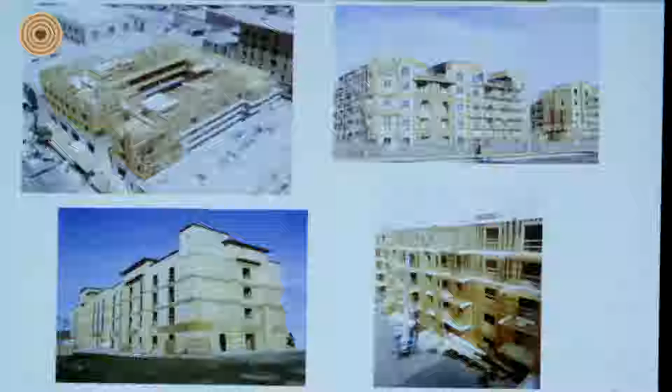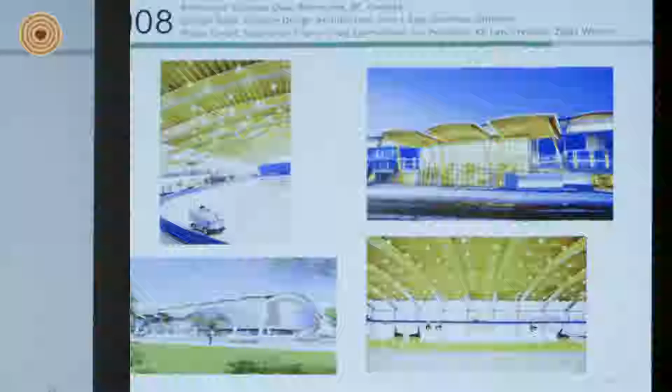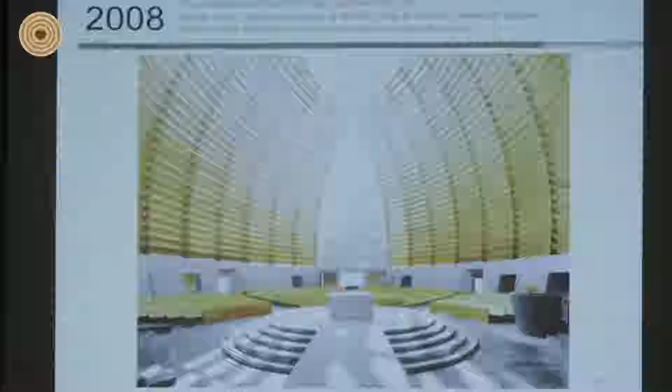But then when I joined Woodworks, it opened my eyes to what really is going on in the rest of the world. Here is a building that was completed in British Columbia, in Canada. And I'll highlight these structures just to give you a feel for what we're going to be talking about. And this is actually in California, high seismic zone, prone to earthquakes, up in Oakland, California. Now, I was fortunate enough to visit this cathedral, and it's so peaceful when you walk inside. Not just because it's a church, but because of the exposure of the wood that you see, the warmth of it.

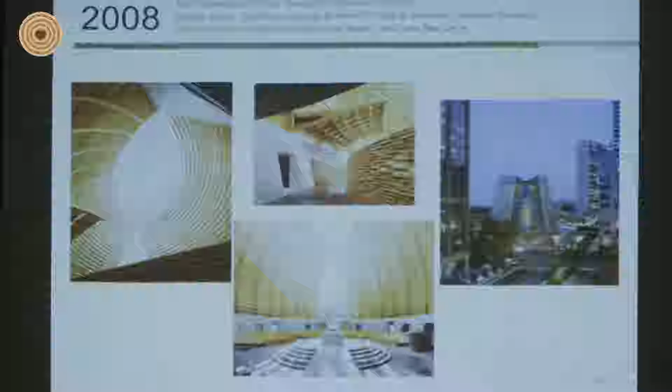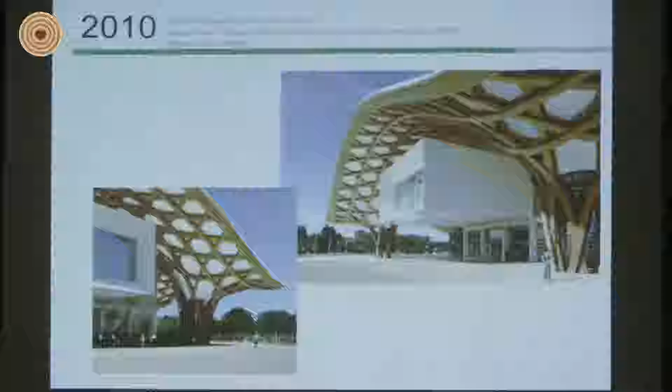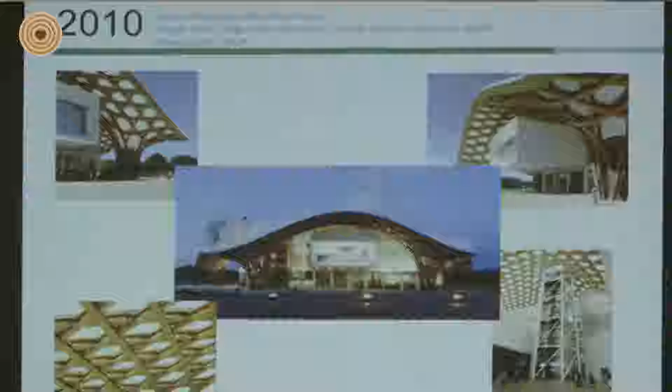And this is a very interesting structure, to the very top of the spire. It's 245 feet tall, but the organic look, how the waves of the wood curve organically, is pretty impressive of what they can do with wood structures. Something we don't always think of wood having the capability of doing, spanning far distances and reaching great heights.

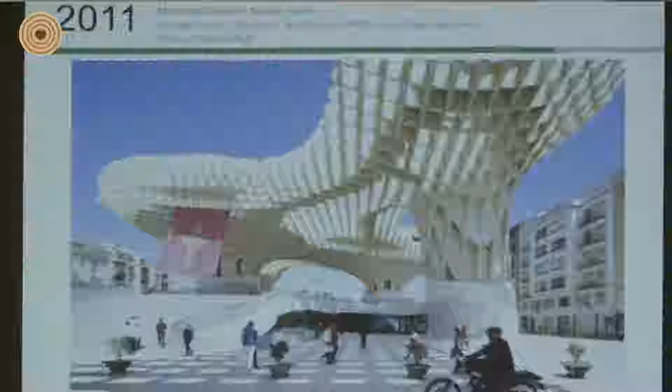This is the largest wood structure in the world, and it's about 85 feet high. I should get my notes out. In Seville, Spain, using LVLs, that's laminated veneer lumber.

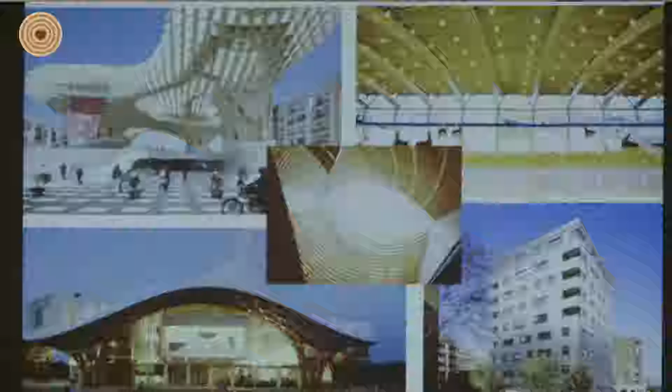So when I joined Woodworks, this really opened my eyes to what's going on around the world. There's a lot of structures being built out of wood. The U.S. is actually kind of far behind on what is actually happening, and in their acceptance of using wood in large structures, we're kind of lagging behind. And that's one of the goals of American Wood Council, to educate and open the eyes of architects, engineers, and building officials on what you can actually do with wood.

And so this is a quote I'd like to share: if the 19th century was a century of steel and the 20th century was a century of concrete, then the 21st century is about engineered timber.

Now, looking back at history, wood has actually been used in structures for quite some time. Here's some structures dating back to 711. Maybe someone can help me with the pronunciation, but this is in Japan.

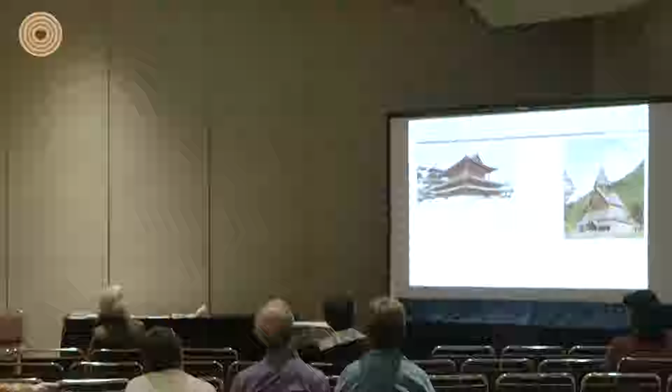But then when you think about it, here in the U.S., we have trees that are 3,000 years old. There's the giant sequoia, western juniper, that's 2,000 years old, and the bristlecone pines that are 5,000 years old. I actually was able to visit that at one time. But we have trees that are still existing, still standing, and they are durable enough to stand the test of time.

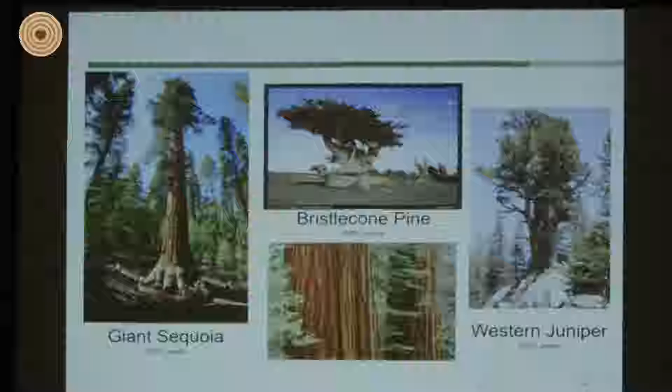So there's evidence that wood structures, if we know how to detail them and design them, can be designed to stand the test of time. It's just understanding the product, which I'm sure all of you know a lot more about wood than I do, from what I've seen out in the expo.

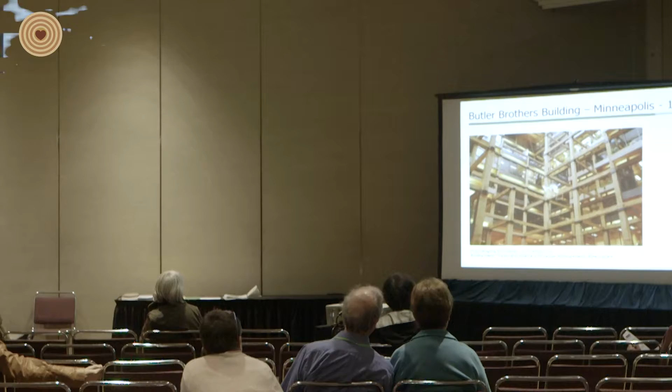And all of these are warehouse type buildings, so there's quite a bit of vertical load on these structures. And this is probably the tallest warehouse heavy timber structure, which is, I believe, 9 stories. Yet the code limits us to only go to 6 stories. And that's where we are at American Wood Council, trying to expand that so we can go taller.

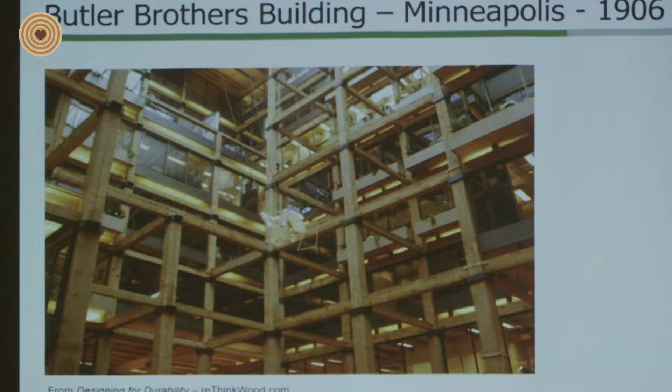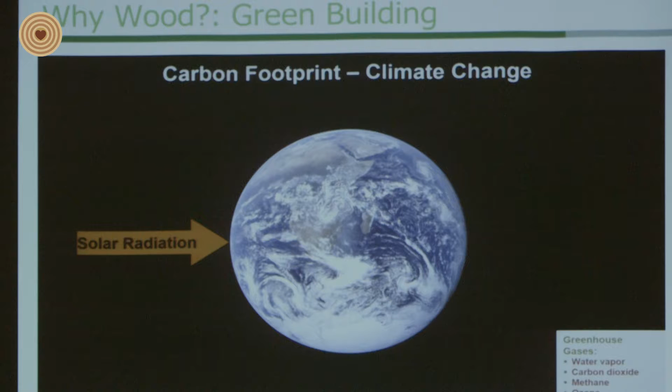And so looking back at the history of what is developed throughout the world and why architects specifically want to incorporate wood into buildings. Some of you may be familiar with climate change, but this is just a very high level of what the thought process is. One, we have solar radiation that heats up the earth, and the heat radiation then goes back out into outer space.

However, there's a gas layer around the earth of greenhouse gases; these are some of the major gases that make up this layer. Not all of the heat is able to bounce back out into outer space, so then we have a buildup, and some of this gas is made by human activity. One of the major gases that some people are concerned with is carbon dioxide, and that's why there's such an emphasis to reduce our carbon dioxide emissions.

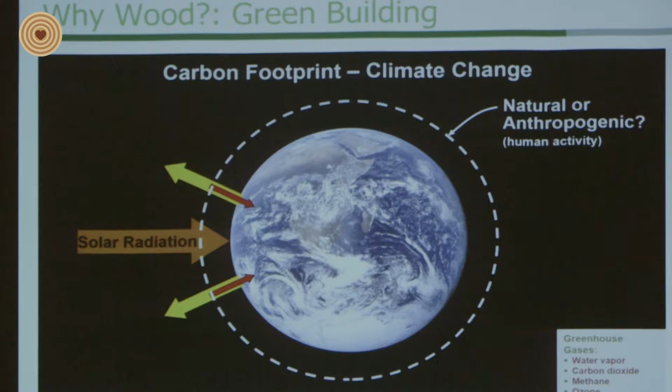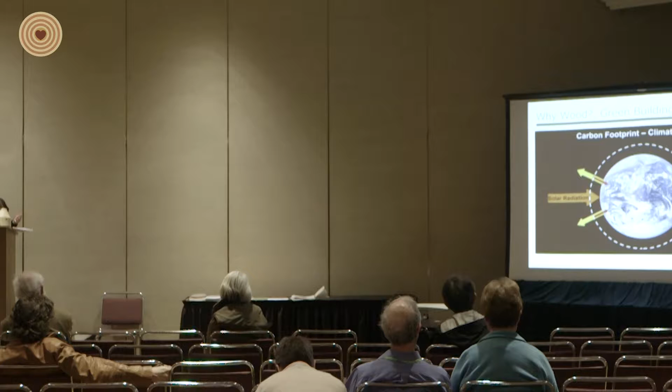So when we look at materials for buildings, we look at the whole life cycle assessment: what it takes to create a product, to get it to the job site, where that resource is coming from. That's why the building industry, especially in other countries, is embracing wood. Wood is renewable when it comes from a sustainable forest. The other materials aren't renewable. They can recycle them, but it takes a lot of energy.

Also, wood stores carbon. It's 49% carbon dioxide, so it stores it long-term until it's disintegrated or burnt, then it goes back into the atmosphere. So they're using this as a more sustainable, greener way of building. Obviously, the greenest is not to build at all or to reuse a building, but that's not always possible, and we're always going to want to build. That's our nature.

So making a very conscientious choice of using wood is what people are choosing. The other reason wood is becoming more popular is because they want to be good stewards of the earth. They want to make sure that they're not utilizing resources that can't be replenished.

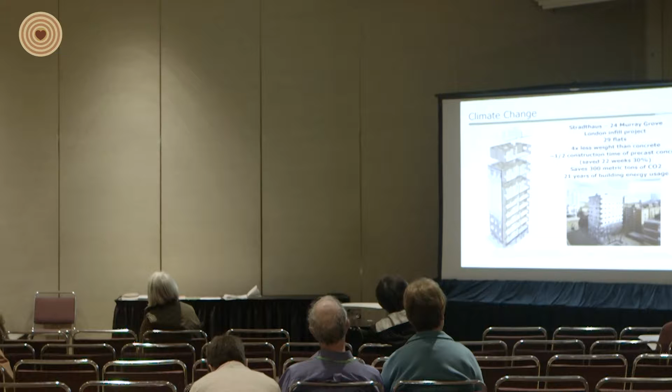So this is one example. If any of you have heard of the Kyoto Protocol, where some countries have agreed to reduce their carbon emissions. One of those countries is the UK. And they state in that agreement that whatever building they build, they need to have renewable energy. They have to have zero impact on the environment as much as possible, but one of those measurables is renewable energy. And renewable energy is really expensive.

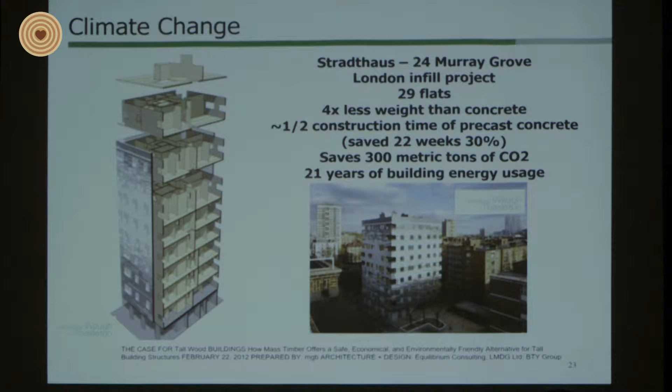So the owner and the architect work together to say, well, when we use wood, we are actually storing, for this structure, 300 metric tons of carbon dioxide. And that equates to about 21 years of building energy usage. So they were able to offset that requirement of renewable energy by using wood in the structure. And I'll get more later.

So the other reasons why we're seeing a shift to using wood in structures is technology, understanding more about the wood material, being able to make wood materials stronger with engineered wood products. Also technology regarding fabrication, using CNC technology to more accurately construct structures. And then prefabrication is also another reason why they're going to wood products. And I'll show you some examples of these three or four

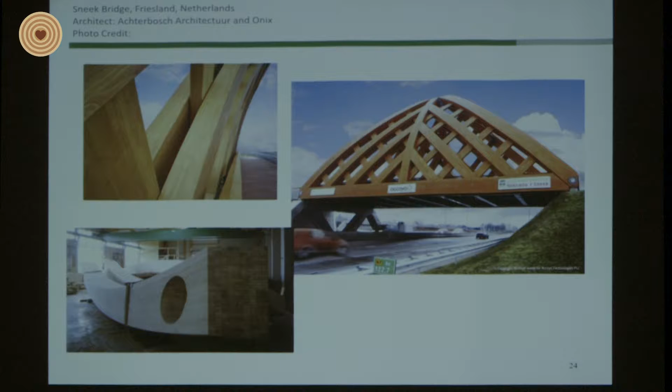reasons why. So that bridge there is a heavy timber bridge and has heavy traffic and spans, let's see, I gotta look at my notes. It spans 105 feet, spanning that.

Here's another bridge in British Columbia, and it spans 145 feet. It does have pedestrian traffic, and it utilizes the strengths of actually 3 different materials. So a higher technology combining wood, concrete, and steel. We have a PT concrete, post-tension concrete slab as the walkway. We have glue laminated timber that is the arch, and also tension rods that are part of the steel structure that acts as the roof.

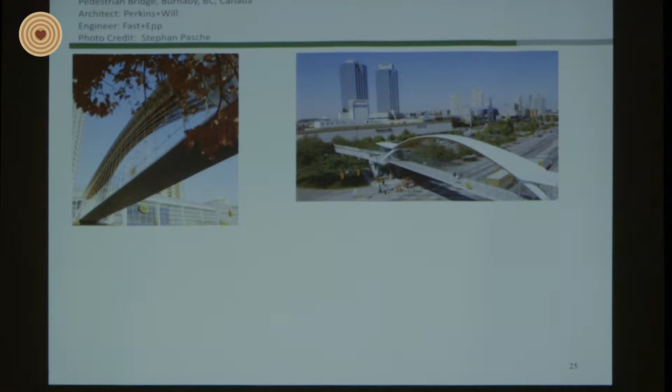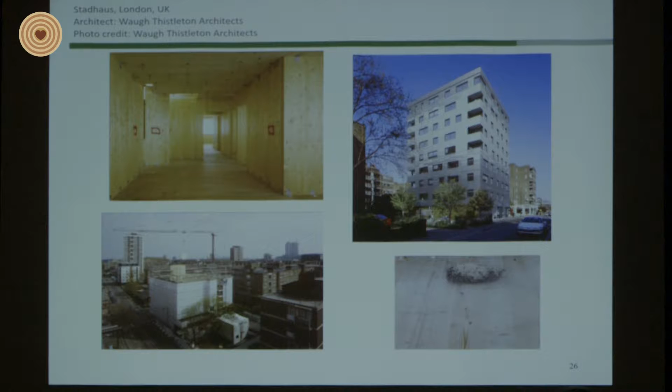And this is more about the cross-laminated timber building in the UK. The other unique aspect about wood is that as opposed to using steel or concrete, which are very heavy materials, wood is lighter. That means that there's less seismic load because the seismic is based on the weight of the building. Also, the foundations are lighter because you're supporting a lighter structure.

And the corner there, because of the prefabrication, all of the CLT panels were fabricated off-site using CNC technology. So they go together very accurately. When they get to the job site, it goes up very quickly, which saves money as well, because the cost of construction can go up the longer you spend on the job site. With the prefabrication process, they were able to erect it very quickly.

And then related to noise pollution, on the job site, it was very quiet as opposed to a traditional stick frame type project, because you hear hammers, nails, drills, and all of that. A lot of loud noises, a lot of workers when they're erecting a traditional wood structure. With this structure, the noise was quite a bit less. You see the crane that would lift it in place, and then

here is the waste of the dust from the job site. Whereas traditional projects, you may see a lot of waste because of the cutting and all of that. And that's the interior. So this is the cross-laminated timber. It kind of looks like plywood on steroids.

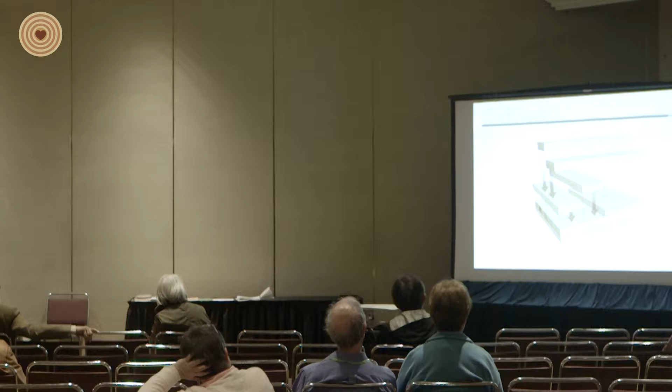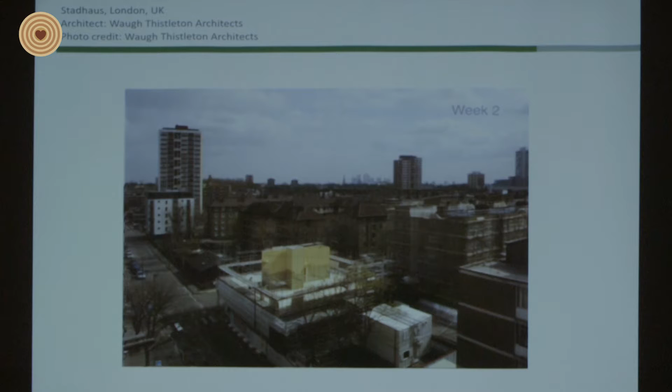And that shows you kind of a graphic of what cross-laminated timber is. So what they do is they lay out the, say, 2x4s all in one layer. Then they apply adhesives, and then the other layer gets applied, and they press it in place and allow it to cure. So this shows you the speed of construction. This shows you per week.

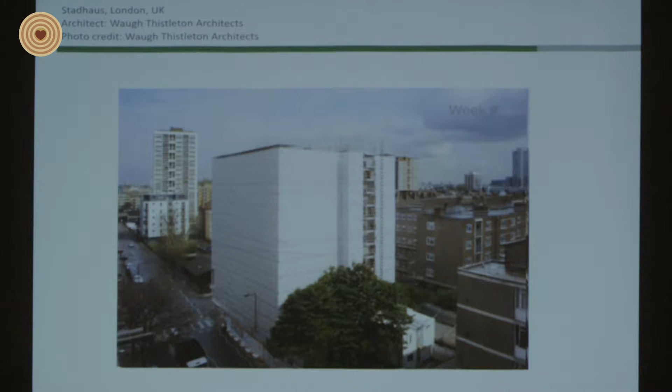And the construction time was half the construction time it would be with precast concrete. So 9 stories built in 9 weeks.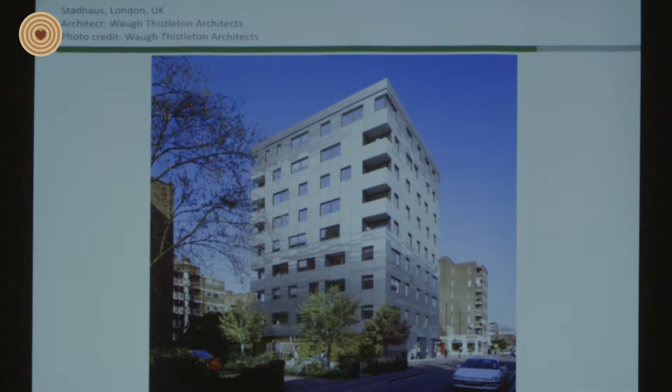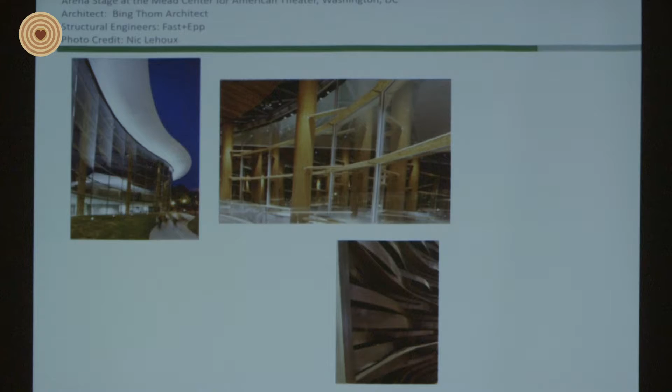Here's an example of technology utilizing wood. This is in Washington, DC, the Arena Stage at Mead Center. And this was a restoration project. It's an existing project that had concrete and steel trusses. These Parallams, which you see here, columns, are supporting steel trusses.

And the engineer designed a connection here that allowed some versatility or movability of these columns that support this exterior facade of glass to pivot about a point so that they had some movement in that for connecting it to the existing trusses.

And this is going back to a little bit more detail about the Cathedral of Christ the Light in Oakland. It's 108 feet tall and uses a glue laminated timber louver system. And then there's vertical glue laminated timber that is supported back on that louver system that supports the glass facade. And they use tension rods as well for the lateral.

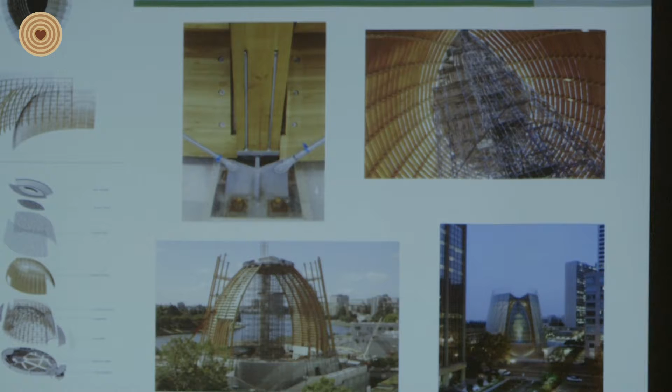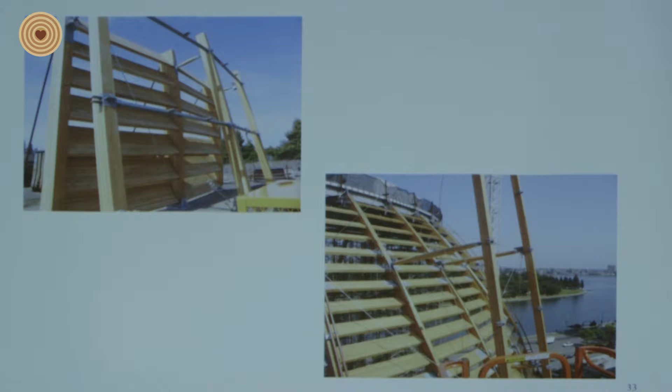But what they wanted to do is this is designed to be a 300-year life building and to withstand a 1,000-year earthquake. It's on a base isolation system. This shows you a mock-up of the test that they performed on the louver system.

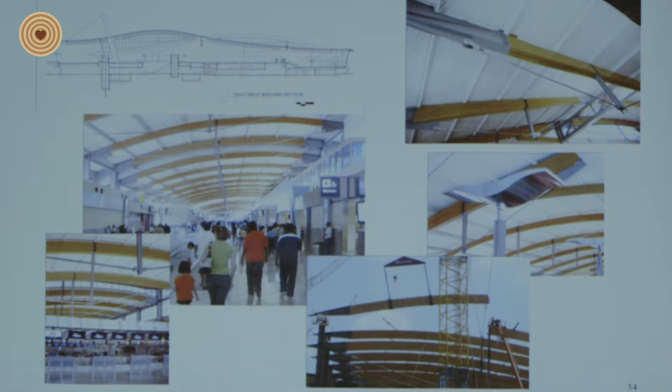And then airports, something that we don't usually think of when we go into an airport. I don't know if any of you have been into LAX. It can be quite sterile, white everywhere. I flew into this airport, and I was just amazed at the warmth of these glue laminated timbers that it provided. So it used a glue laminated timber arch and tension rods on the bottom, so utilizing both steel and wood.

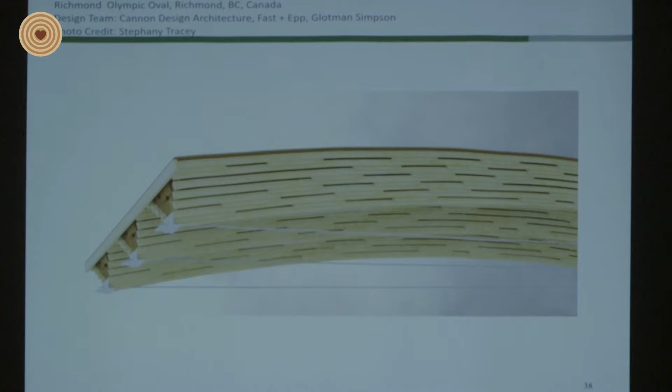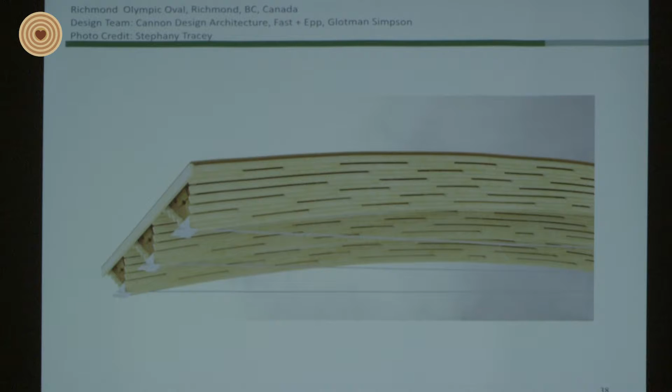And this gets back to the Richmond Olympic Oval, where these trees were infected with a mountain pine beetle, and to get rid of that mountain pine beetle, they'd have to burn the forest pretty much. So instead of doing that, they harvest the trees, and the engineer thought outside of the box and came up with this innovative wood wave. And it spans, I think, about 25 feet, and it uses 2x members all nailed together and tension rods on the bottom.

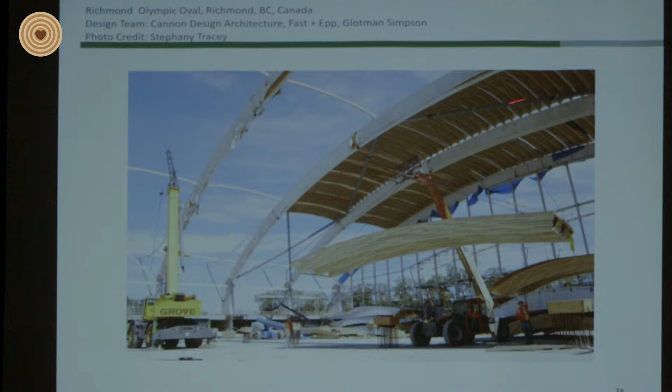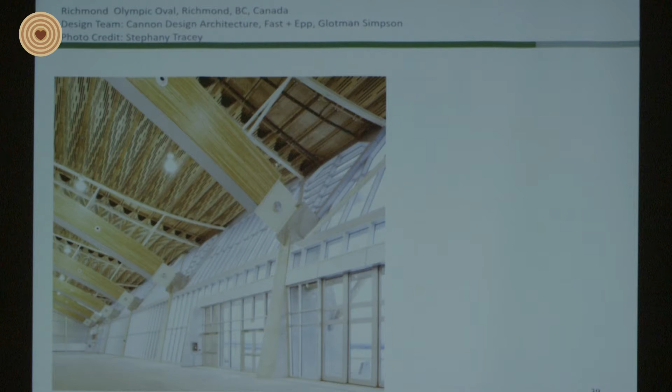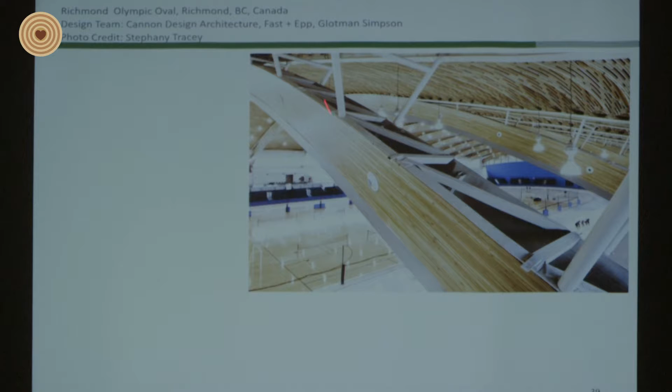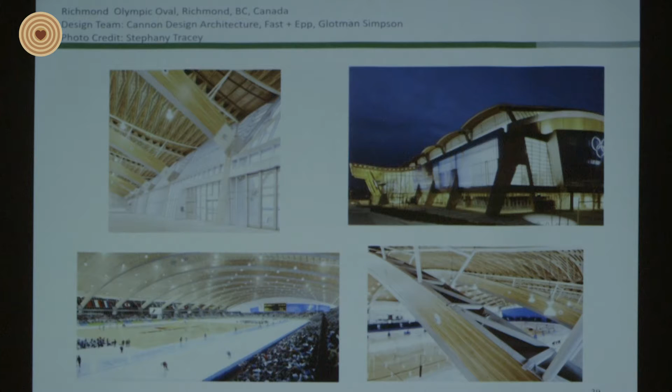You can see this is the wood wave. And they span to these arches that are glue laminated timber steel truss arches that span over 100 feet. One thing nice also is they were able to put some MEP sprinklers through that system, which can be a challenge in architecture, in art buildings. Yeah, they spanned 300 feet actually.

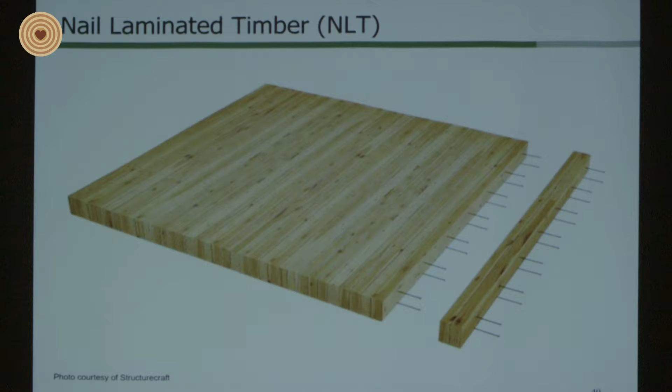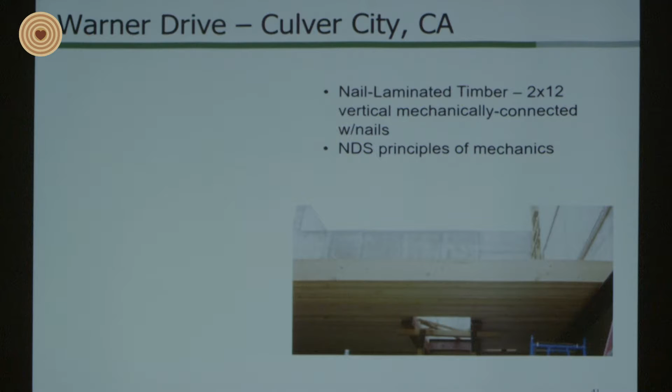So now coming back to the US, all of those really beautiful structures were in Canada or Europe, and we're hoping to educate the US on how to use wood. This system, which is nail laminated timber, has actually been in the building code since 1967. Here's a structure in Culver City, Southern California, that utilizes 2x12s, just your typical framing members, and connects them all together using nails. So it's a solid plate, a solid floor system, all out of 2x12s.

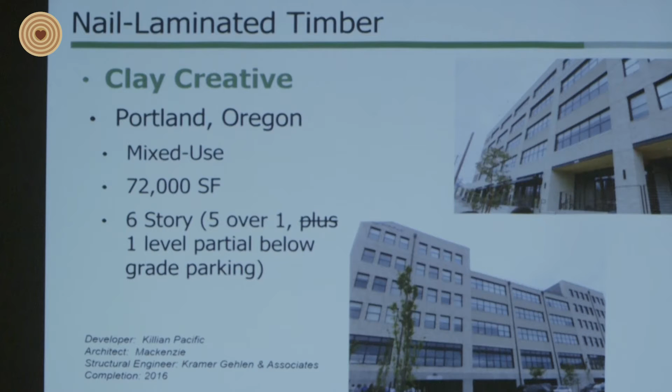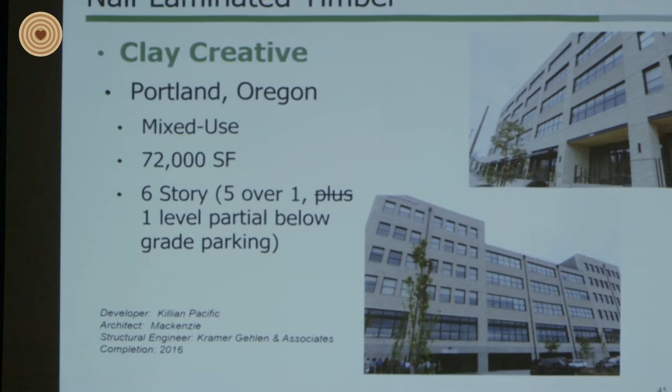This is up in Portland, Oregon, where they're utilizing nail laminated timber. And there's a construction category that's becoming more and more popular throughout the US and North America. It's called mass timber construction. It's not really defined in the building code, but it's using smaller pieces of wood to create big pieces of wood, such as 2x12s to create a big floor system, or cross-laminated timber, or even glue laminated timber laid flat to create a floor system.

And so this is the inside. You can see the nail laminated timber here, which is just 2x nailed together, and the heavy timber construction. I was fortunate enough to go on a tour of buildings in the Pacific Northwest where this is really taking off. And we ran into a developer, and I asked, what's the reason for using this? Because developers want to get there fast, and cost is an issue. These buildings are comparable to steel or concrete as far as cost, but one reason they're using this type of construction is the warm environment that it provides.

Usually in an office building, you're in cubicles, you have white drywall walls and ceilings or suspended ceilings, and it's not inviting. So businesses are using this to recruit people to come work for them, especially in the high-tech industry, where there's a high demand for good employees, and they want to get the best of the best. So this is one reason why, so that they can dangle this carrot and say, you can come work in our office, and we have this really warm environment.

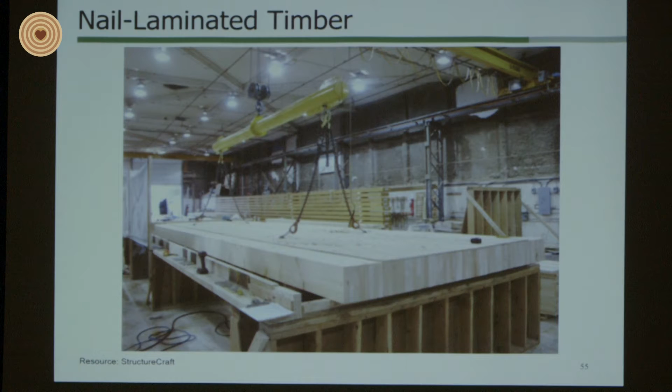So the aspect about nail laminated timber, I mentioned prefabrication was one of the reasons why they're going more to use wood, is that nail laminated timber can be done in the shop, prefabricated and erected in modules, such as shown here, and all the connections done off-site. Then they can ship it to the job site and build it very quickly.

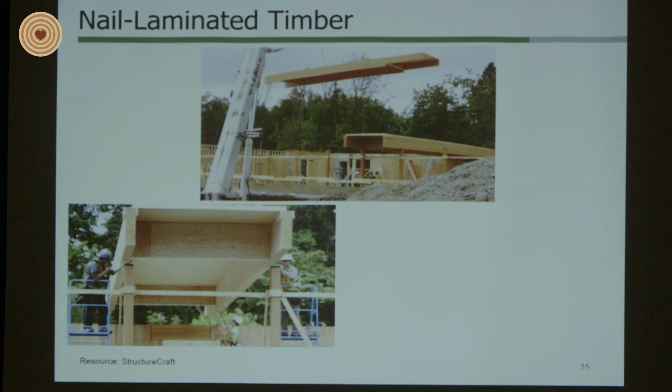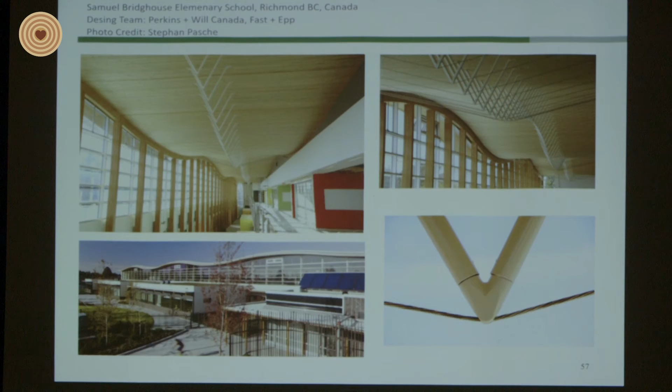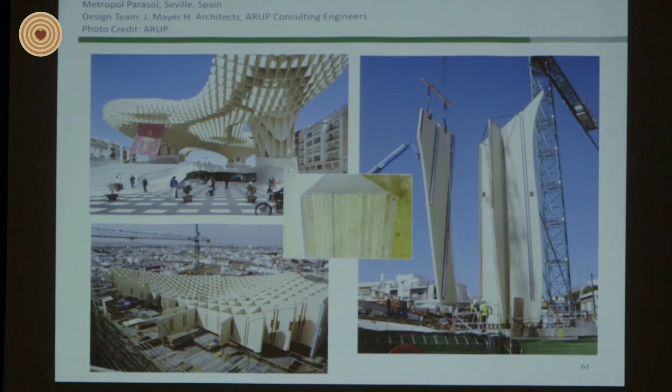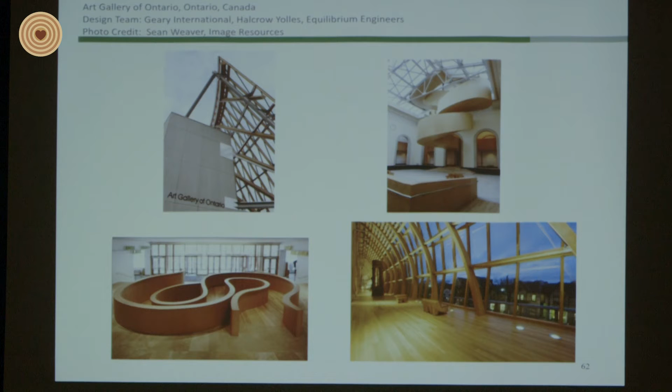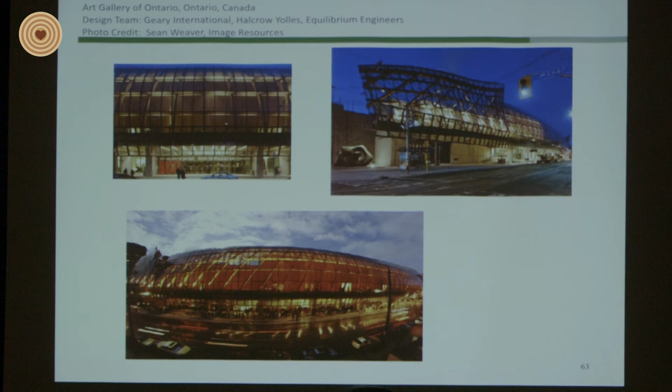And this is, I just like to show this because I like this building, the artistic creativity of the Art Gallery of Ontario, Canada. The architect is Frank Gehry, utilizing glue laminated timber. Each of these glue laminated timbers are at various degrees as they go throughout that facade. And so every single connection was different.

And that's one great characteristic about wood, is that the connections can easily transfer using CNC technology, and machinery can be easily adapted to the different connection orientations.

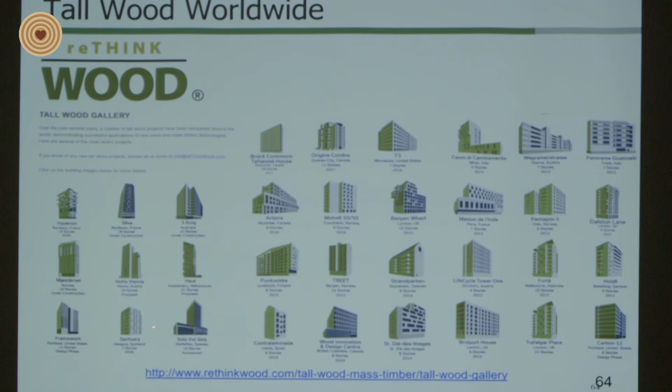If you go to the rethinkwood.com website, it has this library of all wood structures. Some of them are conceptual, some of them are real. You can click on each one of them and it'll provide a lot more detailed information about the actual building. And I'll skip through this.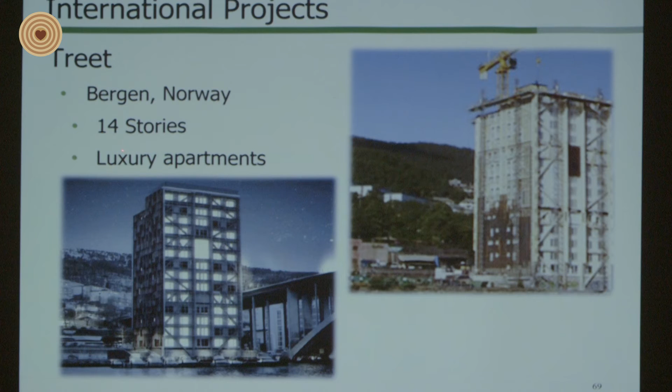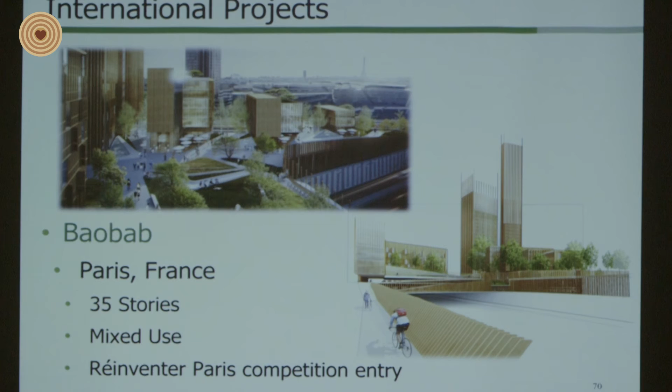And this was the largest cross-laminated timber or wood building in the world, 14 stories in Bergen, Norway. And this is a conceptual international project to go to 35 stories utilizing wood. And then now bringing it back to North America, we have the 8-story Wood Innovation and Design Center. I'll be through in a minute.

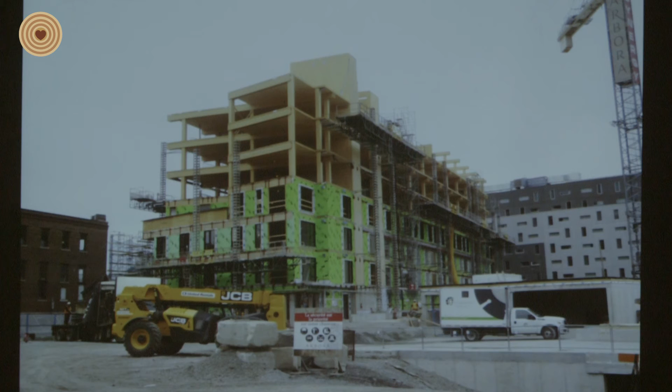And I was able to tour this building, the Arbora in Quebec, Canada, 8 stories, utilizing cross-laminated timber and heavy timber beams and columns.

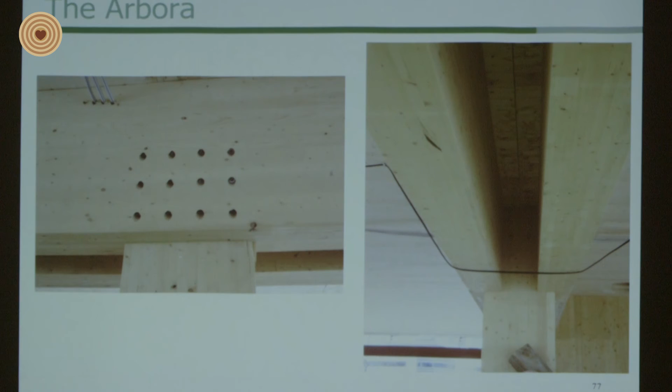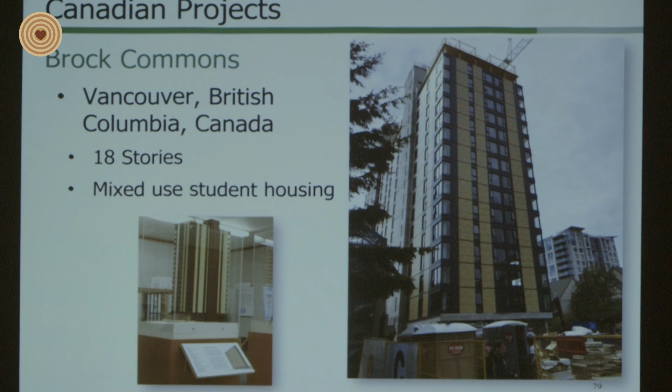Now, this is the tallest building in the world out of cross-laminated timber, 18 stories. The first level is a concrete podium, and the rest are cross-laminated timber, in Vancouver, British Columbia.

And then bringing it back to home, there is a project that's now going through the building department in Oregon, 12 stories of cross-laminated timber. So the first level is concrete, and then 11 stories of cross-laminated timber. It won the U.S. Tall Wood Building Competition.

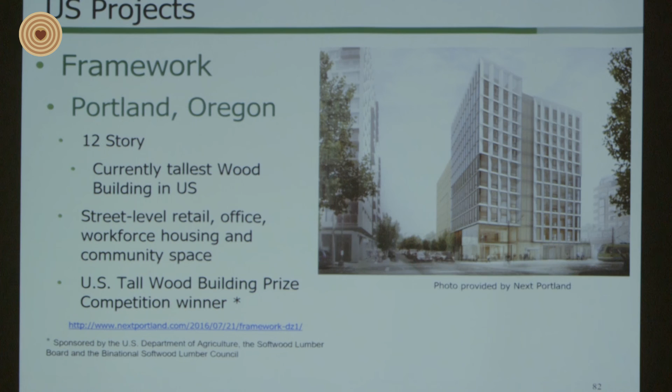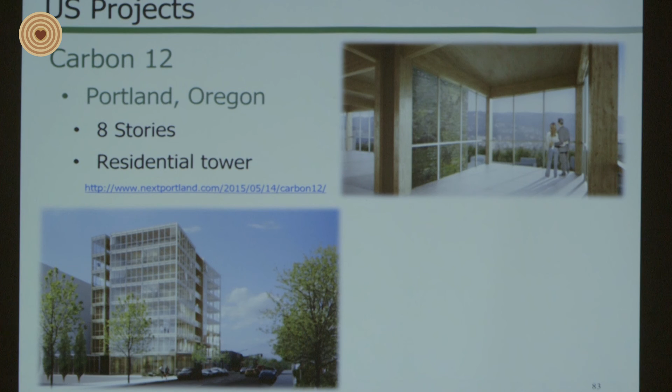And then we have in the U.S., this is, I believe, the tallest now in the U.S. currently. So this is where I started off in 2008 when I joined WoodWorks, and now I'm with American Wood Council.